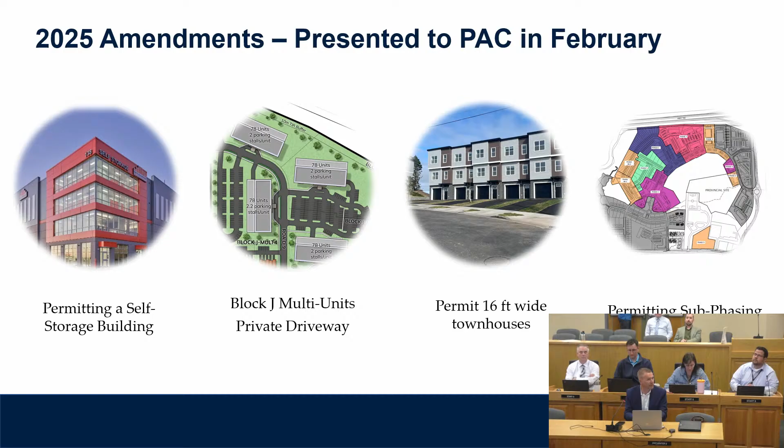So what did we hear? Well, the first thing we heard was that there's a lot packed into this request. So today we're going to break it down a little bit more succinctly and really explain the why behind this ask, the general comments about why we are asking for this, and what's driving it. So we'll cover that today.

There are questions about wetlands and stormwater and the environment and how that works, so we'll dive into that. Townhouses, why the change to 16 feet, multiple residential, private driveway - not feeling quite right about that - so we'll talk about how we address that. Self-storage, is that the right fit for the community? And then sub-phasing, really what are the implications from a municipal perspective? So that's what we've heard, and that's what we'll attempt to cover today.

So let's talk about the why. A lot of this is to work to reduce some of the end home pricing for the community. When we applied for the DA back in 2018 and finally had it signed in 2020, you can see the average price of residential homes in Nova Scotia was in and around the 250 mark. Let's fast forward to today - it's now 450, knocking on 500. That's a big number. We all recognize that.

Surfing on MLS and looking for this - this is a townhouse in our development, the least expensive product we have. It's coming in at 520. When we're working with the builders, saying look, when you're building roads and it's $5,500 a foot to build a road, we've got to start bringing this down a little bit. So that is primarily the reason why we're having these discussions here today - let's try and bring the size down, therefore bring the cost down.

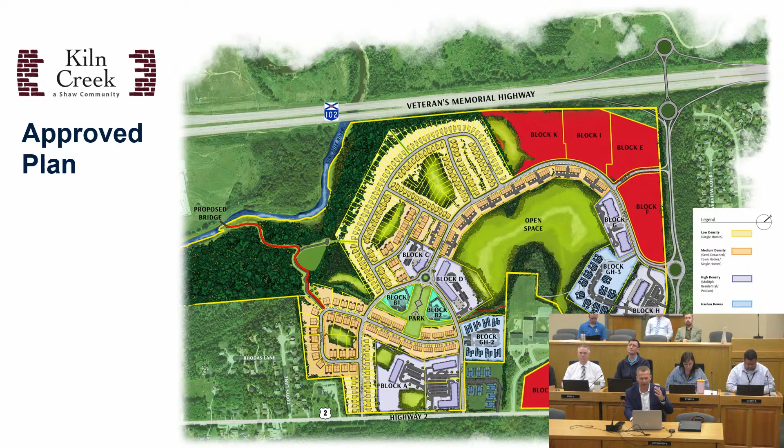Okay, onto the environment. So the big green wetland area on Block K, shown to the north, is the area we have permitted. There are a few questions around how wetland permitting works - we'll give you a high level here today. What I want to convey first and foremost is this entire 247 acres is covered by a comprehensive stormwater management plan. It is not done in isolation phase by phase; the entire project is looked at.

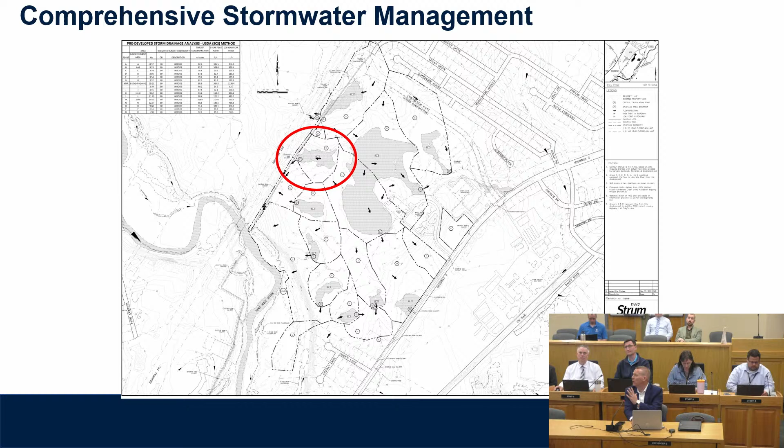That wetland, as shown in that location, actually drains to the north along the highway and then down along Nine Mile River. It doesn't come down into the rest of the development. The rest of the development is comprehensively planned from a stormwater perspective, which means we look at both the quality and quantity of stormwater out of the development to ensure it's balanced.

The picture of the wetland that you see was developed - it's not a natural wetland, it is now, but it was a hole in the ground that we funneled stormwater through to balance that stormwater and create a very nice wetland at the end of the day.

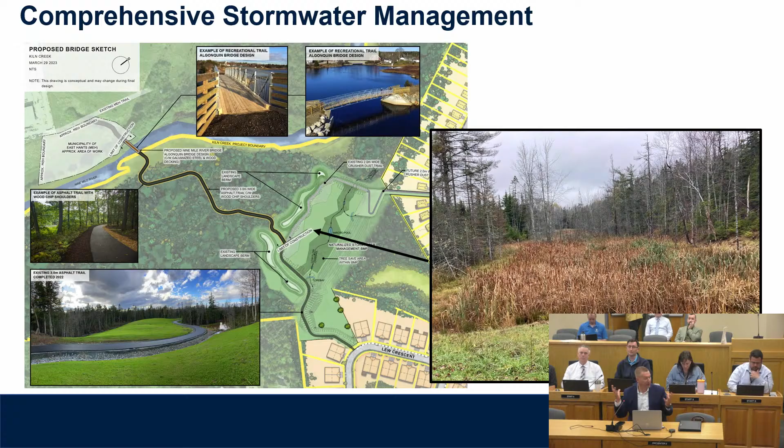On compensation, I'll leave that slide up for a moment - I won't walk through it. But when you go and get approval from the province to remove a wetland, there's a series of steps. It starts with a detailed, robust environmental study to look at the quality of the wetland, its biophysical function, and how that impacts the stormwater around it. It is by far not a rubber stamp - it's an analysis done by our professionals as well as NSDOE's review and critique of it. If DOE does approve the removal of the wetland, in this case they have, it goes into a compensation discussion. In this particular scenario, we're compensating from the stormwater perspective.

Block J is a series of 4 multi-buildings. At one time we had a private driveway running through there. The table said they weren't so sure about that approach, and perhaps it should be a public road instead. That was echoed very clearly by your staff, so we agreed that's the right thing to do. We moved the buildings around, pushed and pulled, to have a bona fide public road. What you've seen there is a full municipal standard public road that'll allow, just like any other public road, snow removal, fire trucks, solid waste, everything.

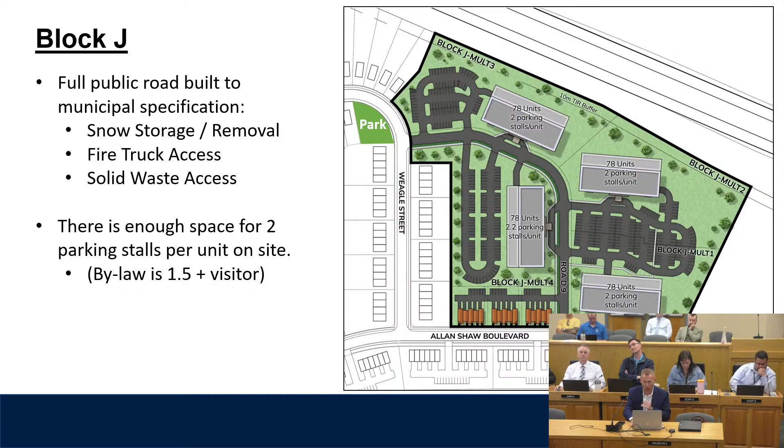In terms of fit and location, we prepared an image to give PAC a better sense of what this might look like and feel like. It's a nice transition from the commercial area into the residential, up against the highway. It's on a collector road, which seems to fit with what we're all collectively trying to accomplish. So we think we've addressed much of what we heard from PAC.

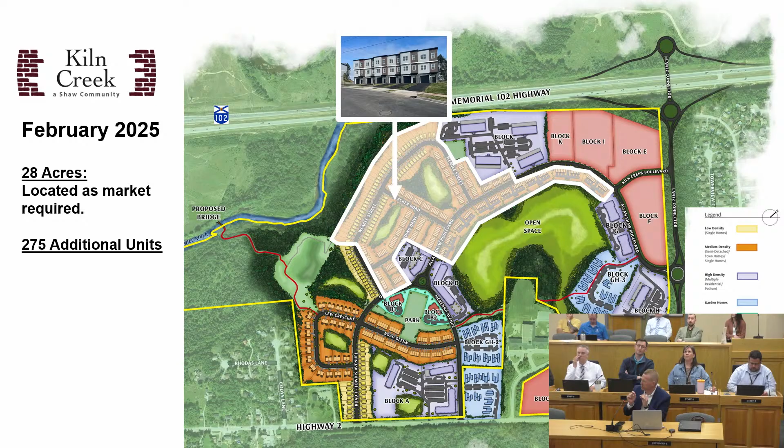Let's go on to the smaller townhouses, the 16-foot wide towns. We went in there and asked for this type of land use over every area in the white, anywhere in the white we want to put it, 28 acres. I think that was an overzealous ask of PAC, so we went back and reworked it, asking where we really think they should be appropriately placed in this development. Let's pull it back from 28 acres to 14 acres, let's half it, and really define where they would fit within the community.

It's shown in white. Along Allan Shaw Boulevard, they're lined along there with parking at the back. You can't see it because it's highlighted in white, but it's rear parking through there. And then the other area has upfront parking, as shown on the screen.

Great question. Someone asked, why 16 foot wide? Why not 15? Why not 14? What's the magic beyond 16? The answer is these units are manufactured at our Prestige manufactured home facility in Sussex, New Brunswick, and the foundations are pre-manufactured at our concrete plant right across the street. You can see the pictures shown here in our West Bedford development.

These units are in our Mount Hope development, and in the West Bedford development, people can drive by and look at them now. The ability to create these units exists in every other development that Shaw operates in, so it's from a modular perspective. That's why 16 foot is the maximum width you can travel down the road.

That's why they're 16 feet. We want to put this type of product in there. It's built to National Building Code. They're a wonderful looking product and very functional. We can control some of that cost because it's our own labor, and we're not subject to the high spikes of demand of whatever the framer wants today. The framer is a Shaw Group employee, and we get to pay them their annual wage, so we can control cost a little better. As I've said, they're existing now in our communities and they seem to function rather well.

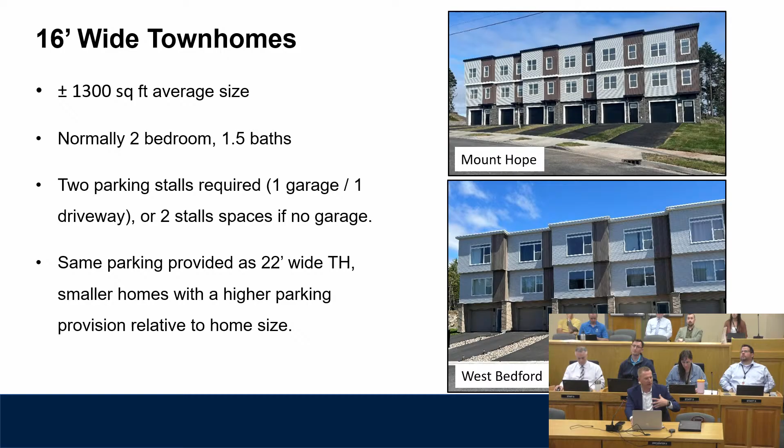Each one of these units will have 2 parking spaces, either out front, in behind, one in the garage and one in the front. There are several ways to deal with it. So that's over and above what you normally require for a single family unit.

Let's talk about self-storage. There's the rationale behind self-storage, and this is it.

We're working with our multi-residential builders to say, can you reduce your rent? Can you make your rent a bit cheaper, less expensive? And they said, we got to make the units a bit smaller, we got to make the parkade a bit smaller. I'm like, okay, well, how do you do that? I said, well, storage. So I noodled a bit on that and picked away on it.

And what it turns out is people in the area that are selling the homestead have winter tires they have to store, Christmas decorations they have to store. When you're downsizing from a house, you have a lot of stuff. And so what the residential builders have been doing is building units big enough for storage. The problem is that it comes at a cost.

So we said, okay, what if we had a 4-story office-style self-storage that'll adjust that? That way you can bring the unit size a bit down. If people want to rent storage for their things, God bless, they can rent storage for their things. That seems to be the right way to handle that.

But I need to say this. We're not hung up on this. If PAC says not interested, no problem. Our focus is on housing, that's our focus. We think this helps the discussion, but if PAC said, I just don't think it fits, it's better elsewhere, no problem, better elsewhere. Drop it off the application and move on with life.

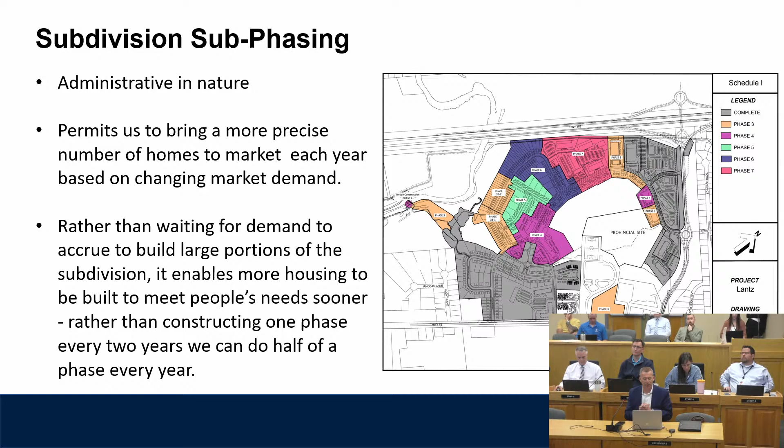All that to be said is it's at the discretion, ultimately at the discretion of your staff from an engineering and safety perspective. We're not running out of bounds on that in terms of second means of access and that sort of thing. So it's at the discretion of your director of engineering and your development officer, and we'll take it from there. But that's the rationale, it's just matching market with infrastructure.

So what we've heard, we think we've covered. You had such a great debate and discussion. We took a lot out of it, listening to it, and thought we can address a lot of this. And I think we have.

When you look back and look at the body of the work going forward today, we're thinking, with your feedback, we're thinking we have a plan now that matches, we think, your community plan. That is a visionary document that you adopted some time ago now. We think this matches your vision, your intention.

Did we step a little too far and ask for a little too much? Yeah, I think we probably did, and you're course correcting accordingly. So that's what we're here today to do, to help course correct that, listen to you, and provide you what we think is a better plan forward.

And I think I would be remiss if I didn't thank your staff in helping us right-size the proposal, saying this might be a better approach, this might be a better way of looking at this project. So I thought it's really important to thank your staff as well. So with that, thank you very much, and I'm certainly here for any questions.

Thank you, Kevin. Any member of council? What are we going to do here? Councillor Tingley.

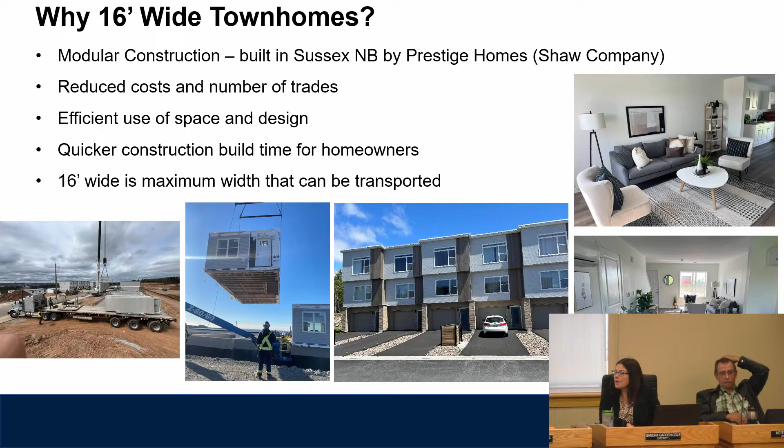Okay, I see that, obviously an advantage from the developer's point of view to get more units in there. I see it as an advantage to people, hopefully it's going to bring the price down some. When I picture our residents there potentially, there's not grass or green space for them, but I guess in the world we're living in right now, that's what our residents are going to have to sacrifice in order to get homes that are affordable - that they're not going to have lawns and whatnot.

And parking, we have an issue on Sam Crescent at the top of Tyler and Enfield, so parking is always a concern.

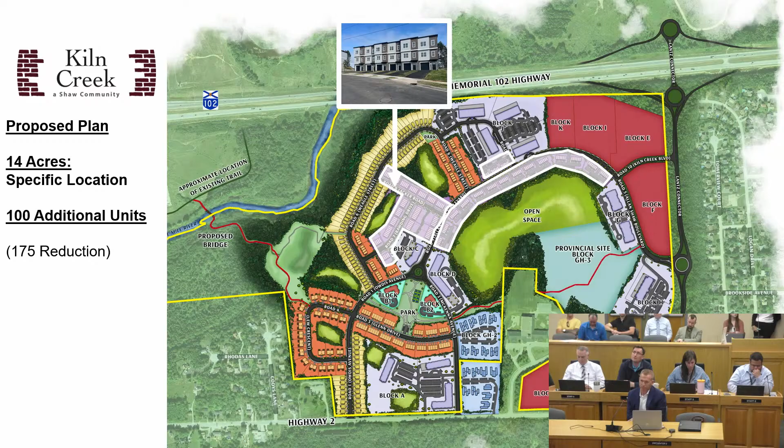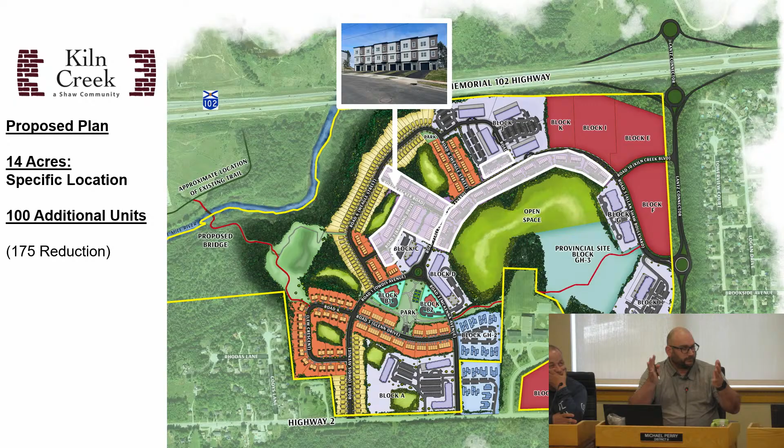When you downsize and go from a house into an apartment, storage is a big concern for a lot of people. If you look at Halifax and Dartmouth and other places, these not-large-footprint, 4-story, almost office-building-type storage units are what's preferable for residents of densified areas. So I think there's warrant in looking at that and at least having the public look at it as well, because it's not just your spot for putting a spare car into storage - it's where you're storing the stuff you want to rotate through your house that you don't have on site because you don't have a garage or storage. It's very common - even when we were in Ottawa for FCM, in developments with 30 and 40-story buildings, there are storage facilities like this within vicinity for that exact reason. So I think it's a way to let people still enjoy things they've collected over the years without making the building they live in bigger. It's easier to put all the storage in one building rather than adding storage to every other building that's built. Thank you.

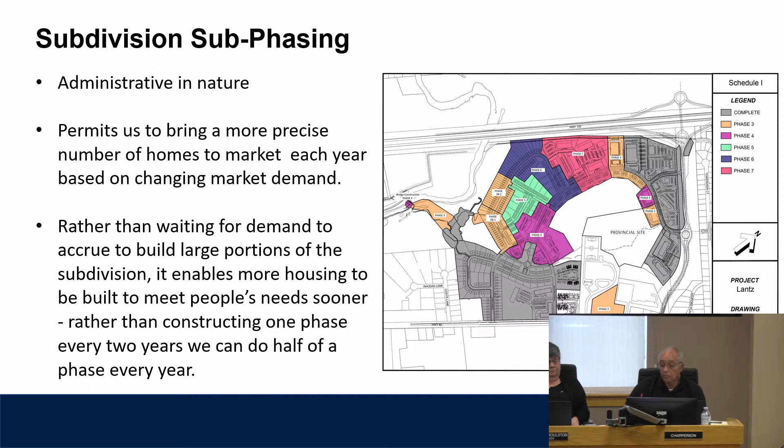Thank you, Mr. Chair. Great presentation, Kevin. The storage building, is it going in an area that's already built or a new area that's being proposed to be built? Is there any construction around it right now? Any resident living there, or just a totally new area?

Through you, Mr. Chair. It is slated for Block K, as shown on the map. It's red. It's right beside the multi-use buildings, so it's a good transition use.

Okay, but nothing's there for now. Correct, nothing there. So my point is the people who are going to live around that, they're going to know beforehand, before they move there, that this existed over there. And if they don't like it, they probably won't buy the house or won't live there. So I don't think that's an awful thing to do. It's great to have storage where you have 5,000 people living, moving to the area or more, to have at least an option for them to have storage there. And to me, it looked like a building, it doesn't look like storage. It looked very nice, and I like it. Thank you.

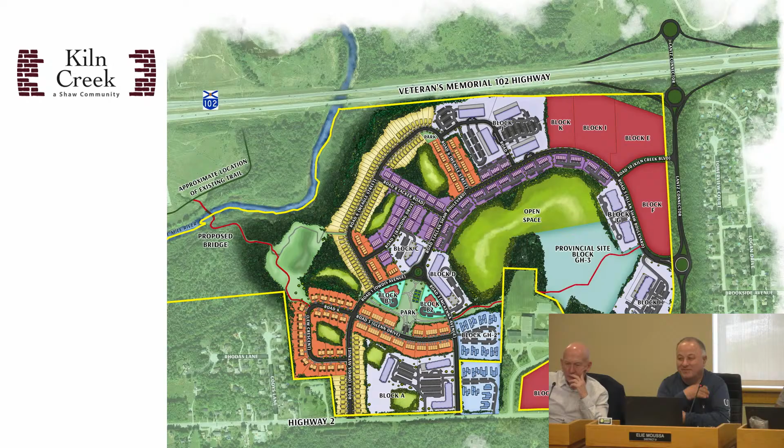Thank you, Mr. Chair. And through to our speaker, Mr. Neat, thank you for the presentation. Very interesting. A question for you about some of the other blocks. That was a question I had too, about what the latest thinking was on the location of the storage facility. So you've answered that, but is it possible, looking at some of the other blocks, and I apologize if you provided the information previously, but just to kind of color in a little bit what the latest thinking is about some of the other blocks?

Through you, Mr. Chair. In terms of the commercial blocks? Well, I guess specifically looking at block K, I, E, F, and block 3. It's not jumping out at me what's happening behind the scenes here. Thank you.

Thank you. Through you, Mr. Chair. Indeed, there's nothing quite shown on the plan. Those, aside from Block K, those are all sold to third parties now, and so there's an active developer with plans in the works. There's several developers, 1, 2, 3, 4 developers in total. They have a lot of commercial experience, certainly in the area. I think I should perhaps leave it at there. It's a bit premature for me to talk more about their private lands, but I think it's fair to say it's commercial service type of use that looks to capture those living in the community around it. Thank you. That's all.

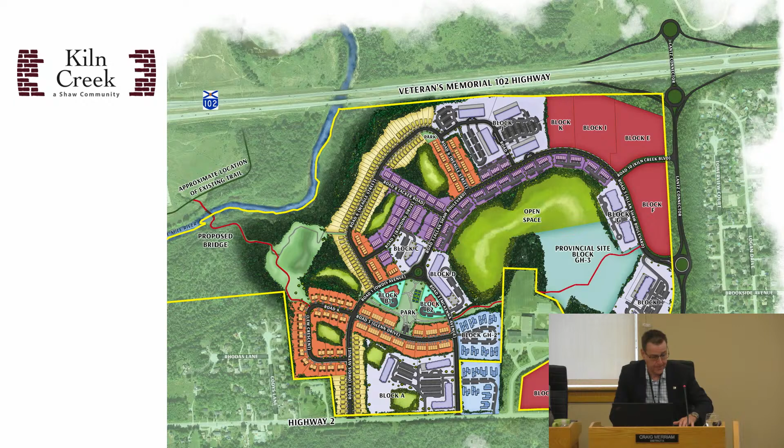Warden Roulston. Thank you, can be very brief. Just to say, I really like your 2 parking spaces. That makes a big difference in people's lives. And that's my comment. Thank you.

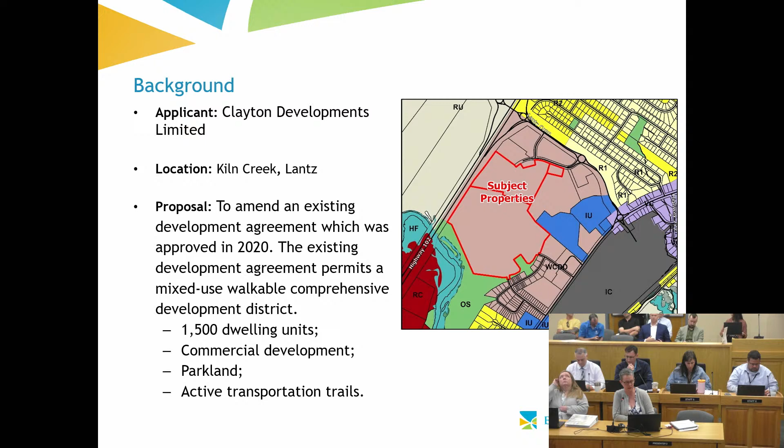Thank you, Mr. Chair. A lot of this will be familiar to you now after the presentation by Mr. Neat, so I'm not going to go into too much detail. Just to remind you that the original application was approved in 2020, and it permits a mixed-use walkable comprehensive development district, which included 1,500 dwelling units, commercial developments, parkland, and active transportation trails. You can see the aerial photograph here, where I've just outlined the properties in red.

The development proposal includes self-storage use, the proposed multi-unit residential, 16-foot wide townhouses, and subphasing at subdivision. Regarding the self-storage use at Block K, you can see that zoomed in a bit more there, and that was originally identified as Block I, so it has always been a commercial area for all the developments.

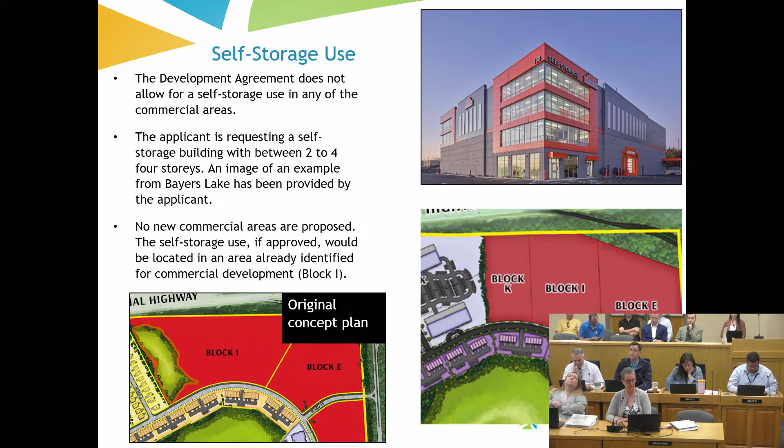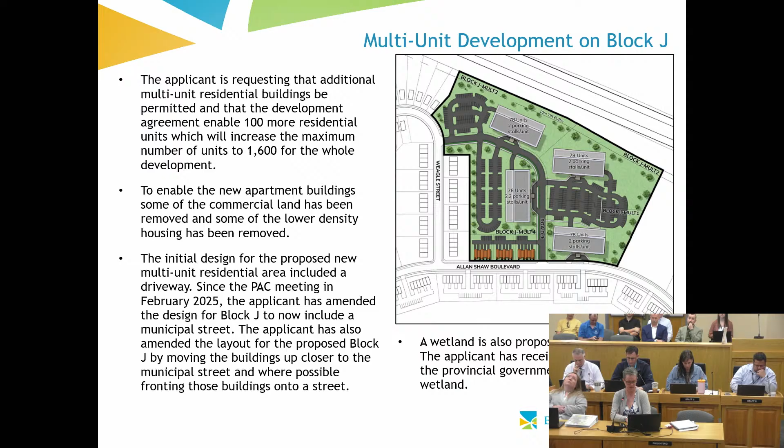For the multi-unit residential area, they're proposing on the concept four buildings for multi-unit residential, and the overall amendments to the concept plan will result in 100 more residential units. As Mr. Neat mentioned, this area has moved from a private driveway to a municipal street, which will meet the standards outlined in the development agreement and match the standard for other local streets in the development. The developer has already mentioned the wetland proposing to be altered.

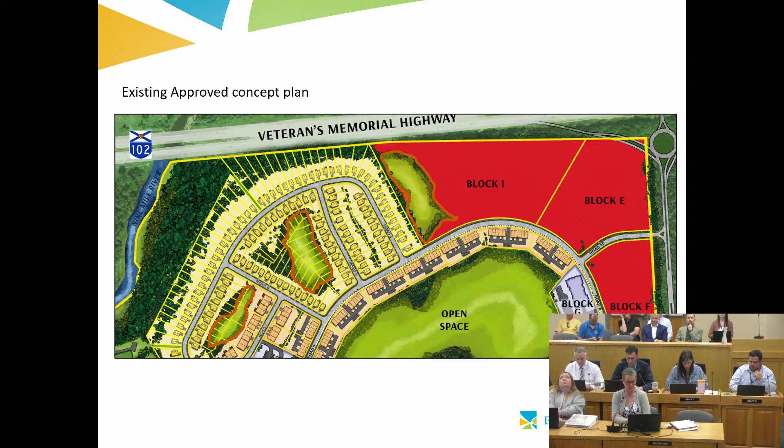This is the original concept plan, zoomed in on the area mostly subject to this application, and this is the proposed concept plan. I wanted to highlight today that the developer will also be providing a pocket park in this location, which will be land provided through the development agreement process.

The image here shows the 16-foot wide townhouses from Mount Hope. Staff are aware that off-street parking is an issue, and we'll be reviewing how the townhouses address parking. But as noted by Mr. Neat, and as in the existing development agreement, they are required to provide 2 parking spaces per unit, which is double what is required in the land use bylaw, since that requires 1.5 spaces for buildings over 6 units, and only 1 space for buildings under 6 units. This development will provide 2 spaces per unit.

Mr. Neat also mentioned that since the meeting in February, the applicant has adjusted the concept plan to remove some of the proposed 16-foot townhouse units.

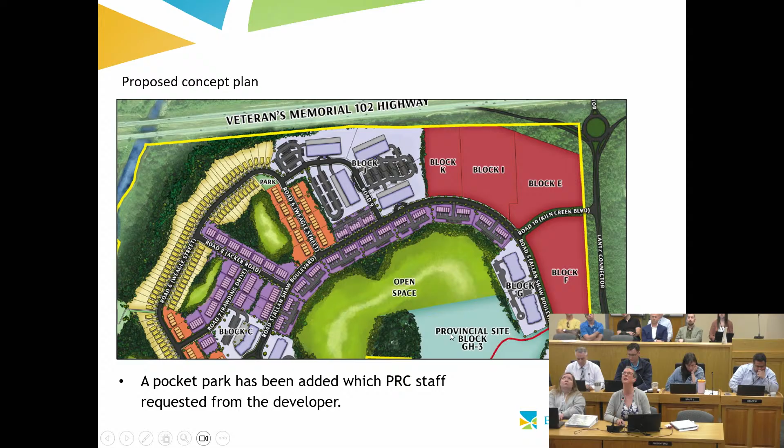There's also the element requesting subphasing in subdivisions. As noted, there is an increase of 100 units, but this count includes the removal of 55 units now in this area. The province has purchased some land from the developer, and there was a proposal for garden homes in that area, but that has been removed from the development.

The applicant has submitted a traffic impact study, which has been provided to the Nova Scotia Department of Public Works and the Municipal Department of Infrastructure and Operations, and we will provide those comments in the final staff report. Planning staff will also consult with the Municipal Department of Economic and Business Development regarding the loss of some commercial land, and the applicant has submitted a post-development master stormwater plan.

It's been updated since the original plan submitted with the 2020 application, and a copy has been sent to Infrastructure and Operations. Essentially, the engineer designing that system is signing to confirm that's the concept for the area, but each subdivision application will require a detailed stormwater management plan submitted at that stage.

Planning staff will comply with the citizen engagement policies, and a letter and questionnaire will be mailed out to property owners within 300 metres of the subject property. As you can see, we're at the initial consideration stage, and the recommendation is that the Planning Advisory Committee lift motion PAC 23 from the table and recommend that Council give initial consideration to the application by Clayton Developments Limited, and authorize staff to schedule a public hearing.

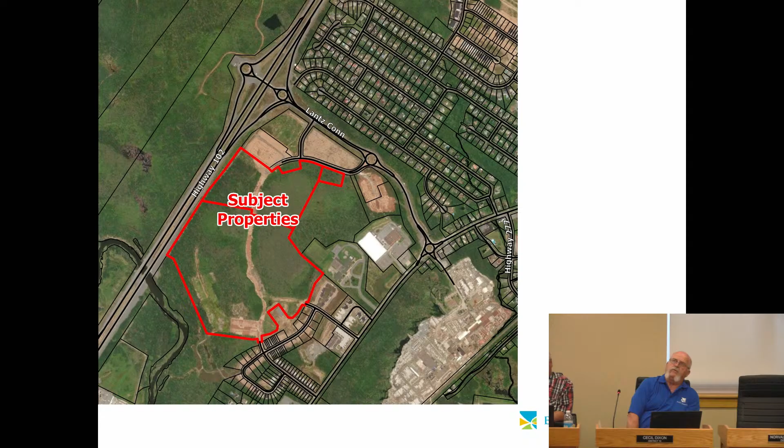Thank you, Councilor. Nobody left to speak, we'll go to the vote. The motion is passed, 12 to 1, with Councilor Rhino voting nay.

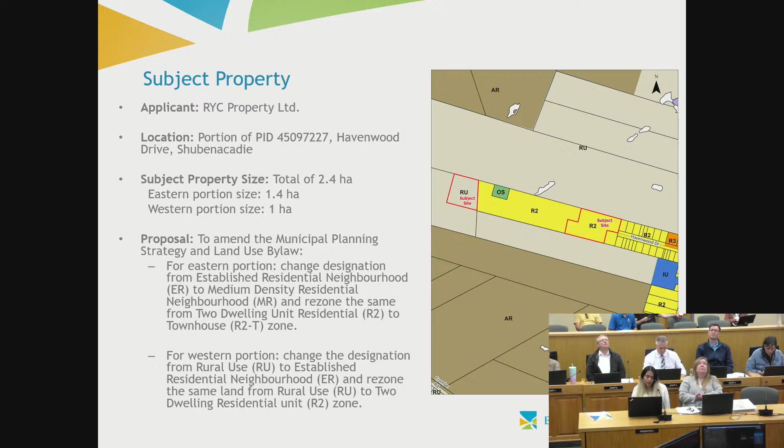The proposal is to amend the municipal planning strategy and land use bylaw. For the eastern portion, change designation from established residential neighborhood to medium density residential neighborhood, and rezone from 2 dwelling unit residential to townhouse zone. For the western portion, change the designation from rural use to established residential neighborhood and rezone from rural use to 2 dwelling residential unit. The application includes a request to allow development of four townhouse buildings for a total of 24 dwelling units on the eastern portion. The proposal to rezone the western portion from rural use is due to a retracement plan extending the property approximately 100 meters further west to accommodate 10 semi-detached units for a total of 20 units.

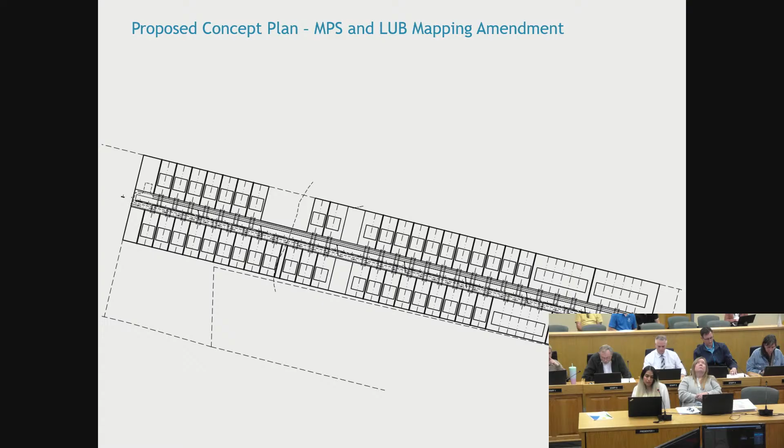A stormwater pond is proposed to be located to the southeast of the property. Here we have the proposed concept plan and MPS and land use bylaw mapping amendments. As shown in red, the western and eastern portions, and the stormwater pond is proposed on the south side of the eastern portion.

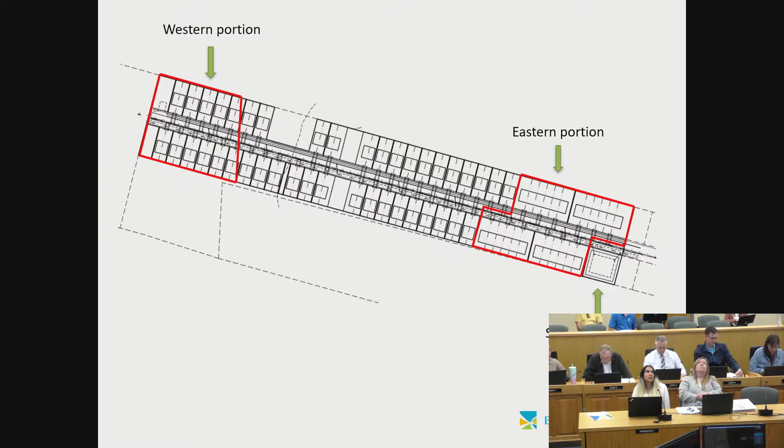And there's some pictures here. As you see, the first view shows Havenwood Drive, and the second view is the land where the townhouse is supposed to be.

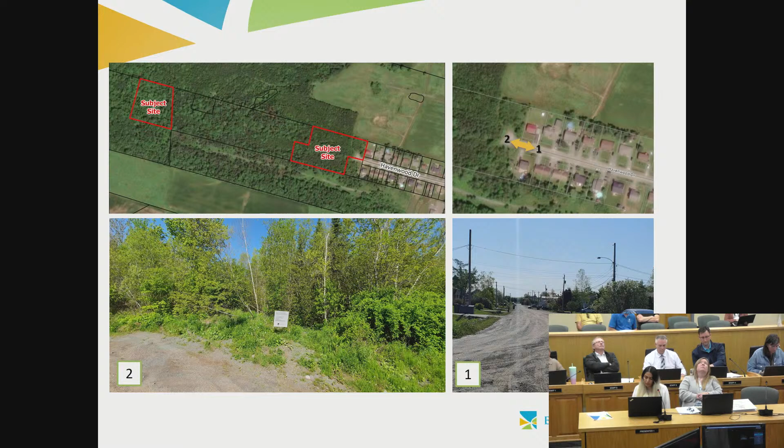Based on the last designation zoning approval for Havenwood Drive in 2024, the MPS and land use bylaw have changed. The existing developed portion of Havenwood is a public gravel road owned by the province. Under the requirements of subdivision bylaw regulation, the proposed road extension will be a municipality-owned paved road with a sidewalk.

Policy analysis: Policy RD29 of the Municipal Planning Strategy is the policy that guides council in evaluating a proposal to establish a new medium-density residential neighborhood designation area. Planning staff will assess the application using the criteria set out in this policy.

Policy IM11 of the Municipal Planning Strategy is the policy that permits council to consider the proposed mapping amendments. East Hants Council has to determine if the proposed application is in the best interest of the municipality. Policy IM11 permits Council to consider a private application to amend the municipal planning strategy where the proposed amendments are in the best interest of the municipality.

Policy 10.16 of the subdivision bylaw established that no more than 100 lots shall be serviced by a single road access. Existing lots total 25, and based on rezoning approval in 2024, 47 additional lots. The current proposal is 41 lots, semi-detached buildings, and 4 townhouse unit lots, for a total of approximately 70 lots and 142 dwelling units.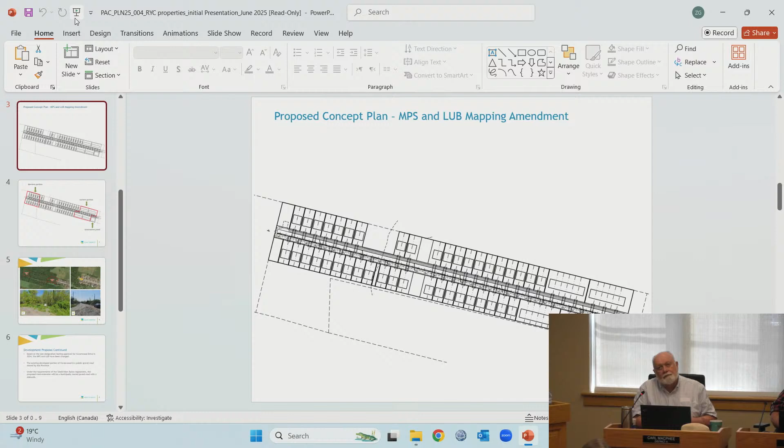Through you, Mr. Chair, it really depends on the format. If you go back to the site plan here, as you can see, there are 4 blocks of townhouses. Each of those blocks is permitted to have 6 townhouse dwelling units if doing an on-street townhouse development. So each block can have 6, and under the 70 lots, those are counted within the 70. If the applicant wanted, they could rent them out that way, or they could subdivide them off up to the 100 lot maximum, selling each on-street townhouse separately.

If it's sold, it would be separate lots then? Yeah, they could do it that way. Okay, thank you. I would like to make the recommended motion.

Planning Advisory Committee recommends that council authorize staff to schedule a public information meeting to consider an application from RYC Properties Limited for mapping amendments to the GFLUM and LUB maps for portions of PID 4509-7227, Havenwood Drive, Shubenacadie.

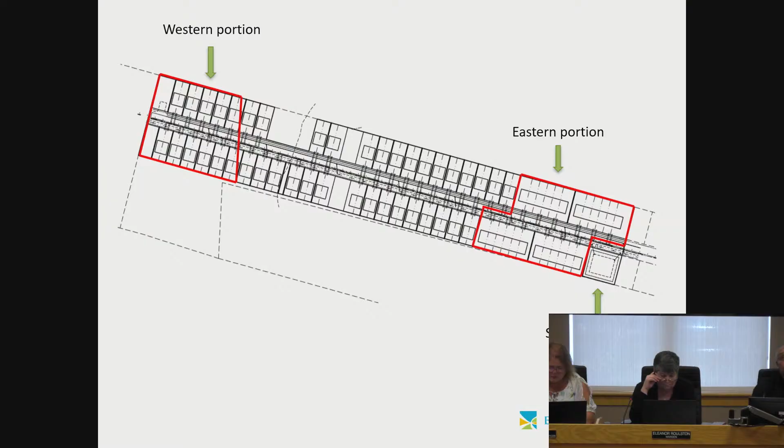Okay, yeah, I see. I missed the 4 townhouse lots when I did my math. That's okay, thank you. Thank you, Warden.

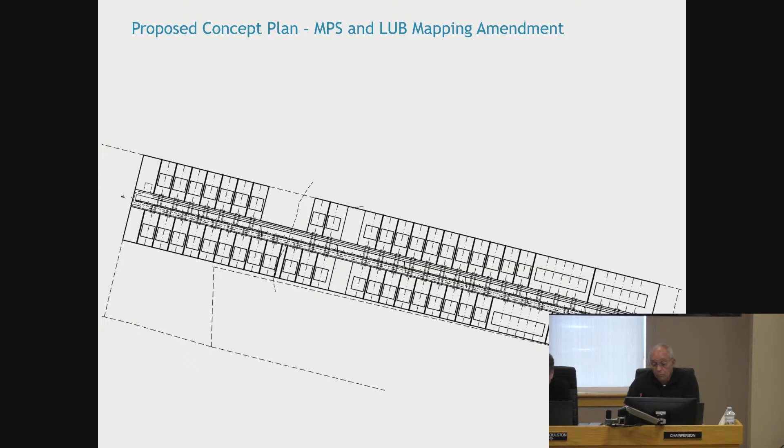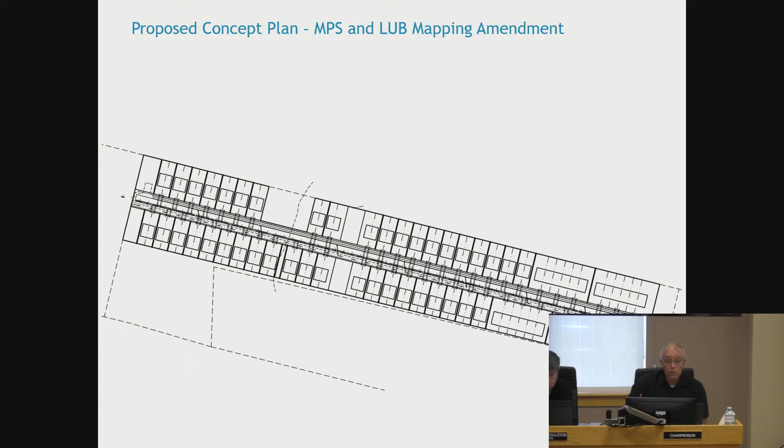Nobody left to speak, we'll go to the vote. And the motion is passed unanimously. Good job. Thank you, Zara, for that report.

Next item on the agenda is Plan 25-003, Serenity Lodge amendments to official community plan. And Debbie, you can begin when you're ready.

Thank you, Mr. Chair. So on March 26th, Council passed a motion to direct staff to find a way forward to assist Ms. McCaskill to separate her business and dwelling two PIDs through a development agreement or an alternative, and that's for Serenity Lodge. Under the current land use bylaw regulations, the subdivision of land cannot take place on a right-of-way easement in the growth management areas serviced by municipal water and wastewater.

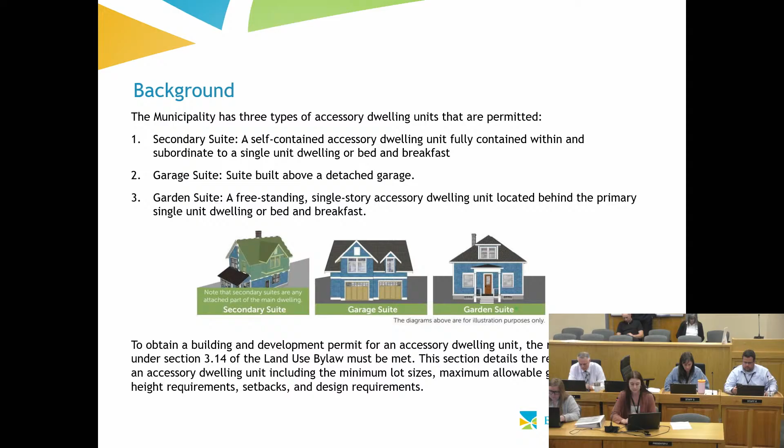So motion C25-159 relates to the requirements for the minimum lot size required for an accessory dwelling unit. The current regulations for the minimum lot size are shown in this table. So if the property does not meet the requirements, specifically if it's an undersized lot, it's not eligible to have an accessory dwelling unit. But we do have a clause that permits secondary suites on existing undersized lots in the country residential, rural use, and rural use north zones. For a garage suite, the minimum size is 600 square meters or shall comply with the minimum lot area, whichever is greater. And a garden suite is 920 square meters or the minimum lot area for the zone, whichever is greater.

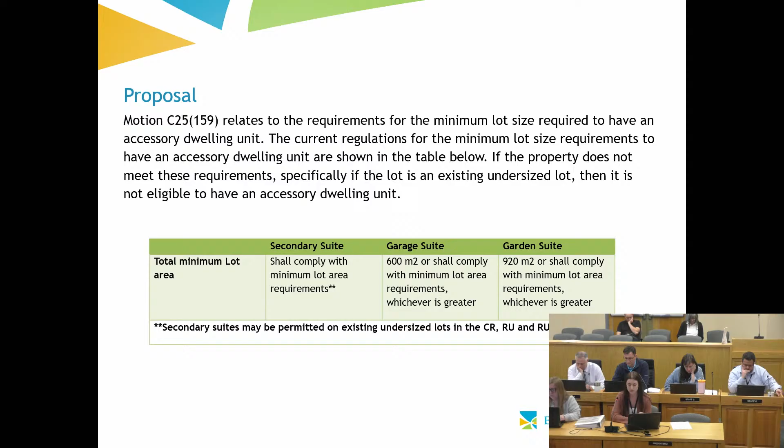So should PAC and council wish to allow accessory dwelling units on existing undersized lots, amendments to section 3.14 are required. An amendment to remove the clause that states garden suites and garage suites must comply with the minimum lot area as described within the zone. By removing this clause, the total minimum lot area for a garage suite would remain at 600 square meters and 920 square meters for a garden suite. All other applicable driveway or on-site septic approvals are still required. So just removing the text in green.

And for secondary suites, we'd be adding to the existing clause to include the Lakeshore Residential Zone as a permitted zone that allows secondary suites on undersized lots, and to add unserviced R1 and R2 lots. So secondary suites would be permitted on undersized lots in the Lakeshore Residential, Country Residential, Rural Use North, R1 and R2 zones that are not serviced by our central services.

So motion C25-28 relates to the design requirements for accessory dwelling units. The regulations currently require that the unit must match the main dwelling in material type, color, and roof pitch, with exemptions for shipping containers used as garden suites, as well as mini homes used as garden suites. Garden suites are also exempt from the design requirements.

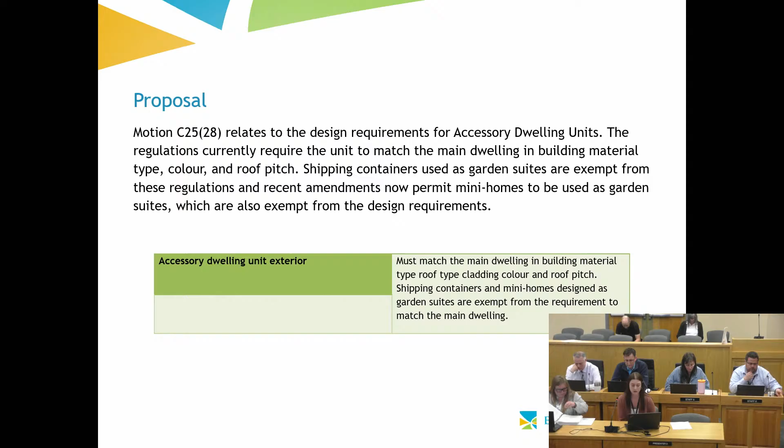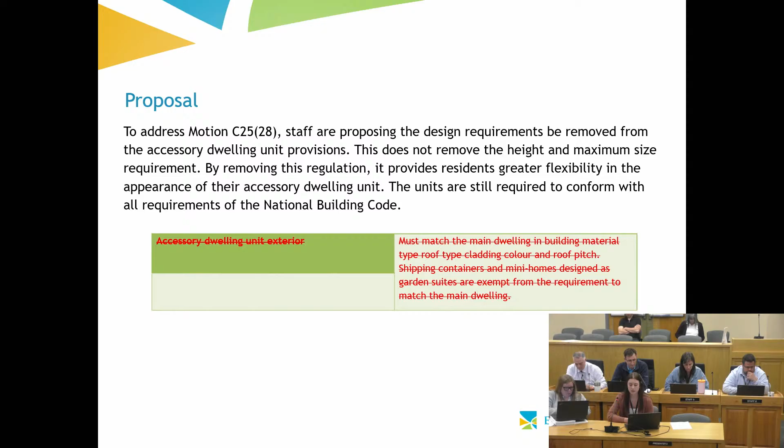So to address motion C2528, staff are proposing the design requirements be removed from the accessory dwelling unit provisions. This would not remove the height requirements or maximum allowable gross floor area, but removing this regulation provides residents greater flexibility in the appearance of their accessory dwelling unit. All applicable requirements under the building code are still required to be met.

For citizen engagement, there'll be an advertisement outlining these amendments in the Chronicle Herald, and questionnaires will not be mailed out as these are not site-specific amendments to the land use bylaw, and a public information meeting is not required as there are no amendments to our planning strategy proposed.

And if council authorizes a public hearing, an advertisement will be placed in the Chronicle Herald indicating the date, time, and location of the hearing, as well as all the information will be on our municipal website and social media platforms. So the recommendation is for first reading of the proposed amendments, and staff are also providing an alternative should

PAC and council wish to remove the minimum lot area requirements for accessory dwelling units. So this would permit any property owner with a single unit dwelling to have an accessory dwelling unit regardless of the lot size. And this alternative would meet the intent of the motion that was passed.

Staff do recommend keeping a minimum lot size in place for garden suites and garage suites to ensure that smaller lots do not result in having a higher lot coverage, because this would be a particular concern for lakeshore lots where you have higher lot coverage. It may result in some environmental concerns, including more impervious surfaces on the property, resulting in more challenging stormwater management, flooding, and runoff concerns into lakes.

So that's an alternative, but the recommendation and recommended motion are presented. Thank you, Mr. Chair. Thank you, Leanne.

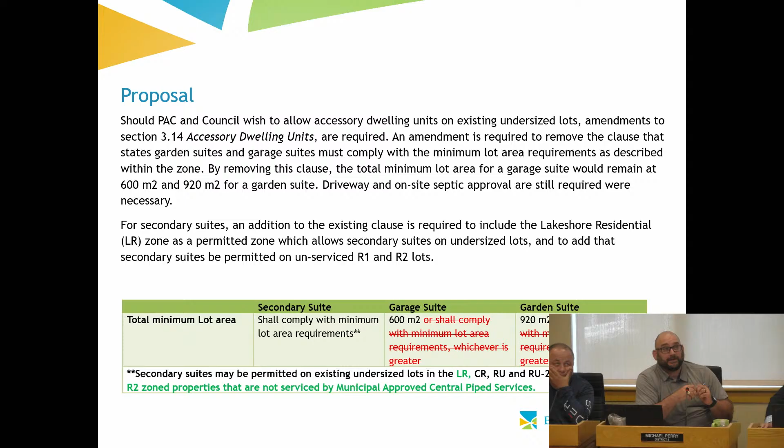I don't know off the top of my head if their lots are 600 meters square. And I think that's, you know, so that's the only question I have. Thank you.

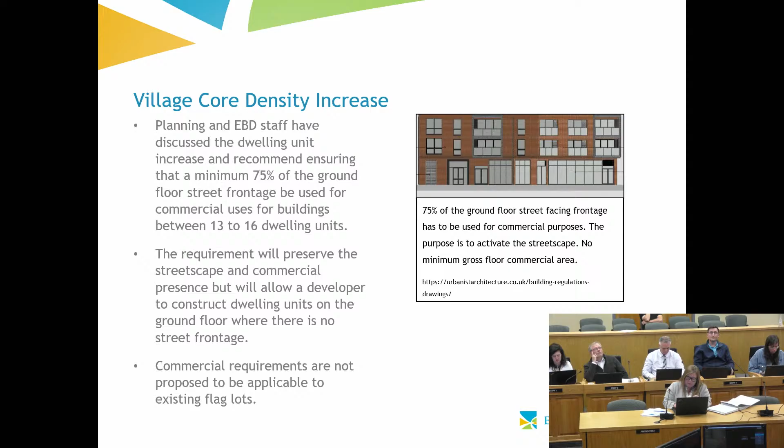In addition to allowing for the increase to the number of dwelling units, both the maximum gross floor area and the maximum building height will have to increase to enable the increase in unit numbers. At their May 2025 meeting, Council gave first reading to amendments which included a maximum gross floor area of 1,888 square meters. The purpose of increasing the gross floor area is to enable the development of 16 two-bedroom apartments and a commercial floor area on the ground floor. Developers who attended the public information meeting indicated that the gross floor area needed to be large enough to accommodate the apartment's commercial area and the corridor and utility areas.

They indicated in the market that approximately 1,000 square feet in area per apartment unit would accommodate market demand. To accommodate the additional dwelling units, staff recommend permitting a maximum of 3 stories without requiring the third story to be constructed into the roof line.

To assist the Planning Advisory Committee in visualizing the mass of a building constructed to the maximum gross floor area under our current regulations versus the proposed amendment, staff have provided an illustration showing the size of the buildings. So this is the current 835 square meters, and this is the proposed 1,888 square meters.

As an example, if it's divided over 3 floors, this is Les Turner's building on Highway 2. It's approximately 835 square meters, 3 stories, with the 3rd story built into the roof line.

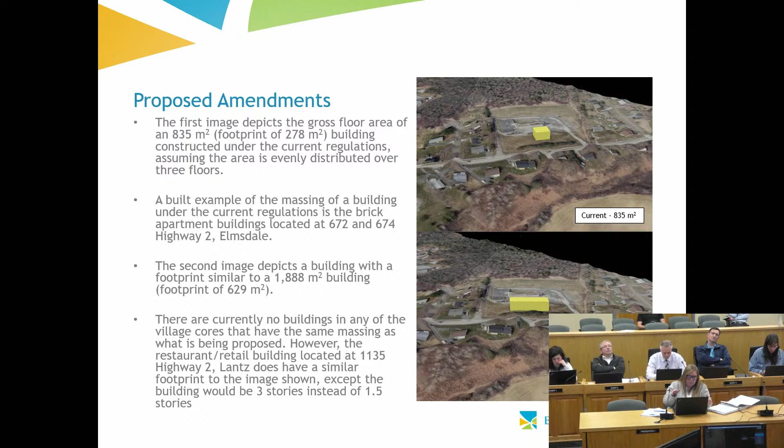There's no current village core buildings built to 3 stories with that size because our regulations don't permit it, but the footprint would be similar to what we have with the Millstone and Lily Pond building.

So that would be the same footprint approximately, not gross floor area. And then instead of a story and a half, which is what's shown here, it would be 3 stories. There's actually a story and a half here because there's a kind of space in the roof line.

Changes are also being proposed to the following: the height to allow for the full 3 stories, transparency requirement reduction on the 2nd and 3rd stories, commercial component not required on existing flag lots, no accommodations general uses on the ground floor of the subject buildings, and new policy added to the municipal planning strategy to enable new regulations. The full set of the proposed amendments are in staff's report.

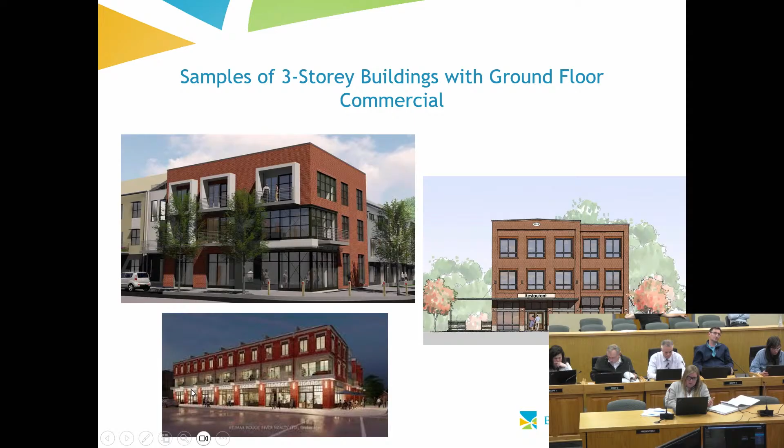These are some samples of 3-story buildings with some commercial on the ground floor. This is probably similar to the footprint you'd be looking at for the gross floor area, so it's a larger footprint, except you'd only be required to have 75% of that ground floor as commercial, and then you could have the entrance to the apartment units at the other end.

For citizen engagement, we've advertised the proposed amendments on the municipal website and in the Chronicle Herald. A public information meeting was held on April 1st, and 2 developers of the Village Core VC Zone land attended the meeting.

The 2 major concerns were the proposed maximum gross floor area being too small at that point in time, and parking requirements. There are no proposed changes to the parking requirements at all.

A letter from Tolson Developments concerning the proposed amendments has been provided to Planning Advisory Committee for their consideration. A public hearing notice appeared in the June 11th and June 18th editions of the Chronicle Herald, and the notice will be on the website as well.

In conclusion, the increase to the number of dwelling units in the Village Core Zone was a commitment that East Hants made when entering into the HAF program. The new regulations will be applicable to all Village Core VC zones.

Existing design requirements will still be applicable to all new buildings, and new commercial requirements will be added to ensure the land use pattern lends itself to providing more human scale development that has an interesting fabric at street level. Diversity of buildings and land uses will keep the Village Cores interesting and inviting to pedestrians and local commercial development.

The recommendation is to give second reading and approval to the proposed Village Core amendments, and the recommended motion is below.

Thank you, Mr. Chair. Thank you, Debbie. Good report. Warden Ralston.

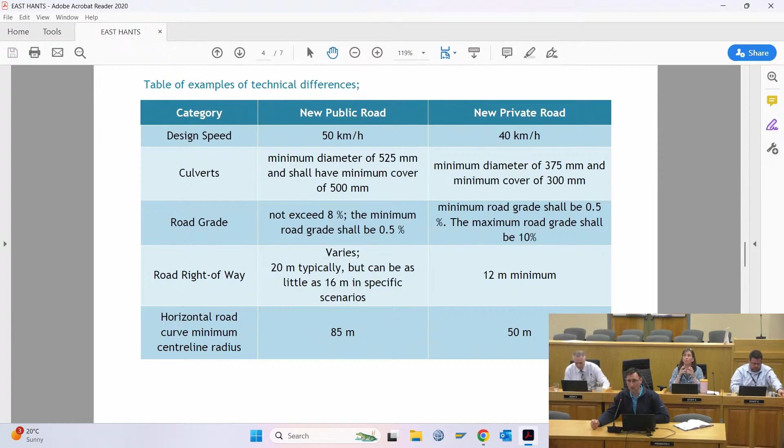So that's it in a nutshell of where we got to at that time.

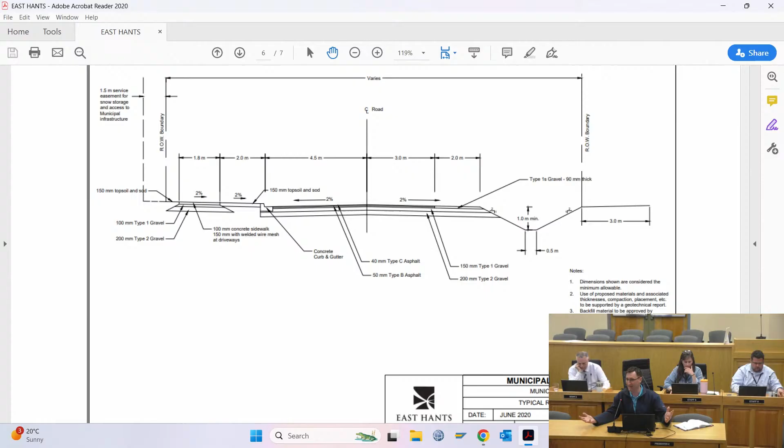There isn't, and within the report and attached to the report, I just showed the basics. So a cross section, it's pretty basic versus a public road. We've got all kinds of different criteria and design considerations. The private one is very basic, very straightforward.

So I did misstep a bit in describing private driveways, something that's emerged in the last 5 years that didn't play out before there was a standard. We now have this emergence of private driveways.

I'm stating that it's more in the serviced area. That's actually incorrect. There's private driveways emerging all over East Hants. In the urbanized area, they end up being within DAs, so there is some level of discussion.

What's happening, and planning helped me articulate it better this morning, unfortunately it's not in the report, is that a lot of flag lot designs will create a private lane, a private driveway, which isn't a road and doesn't have to meet the private road standard. You can have multiple flag lots sharing an easement. It's called a driveway, and it's a named driveway that you'd see on a road, but it's not a public road.

And so it's still imperfect because there's yet another workaround that's emerged. There's still folks finding ways of saying, hey, we don't want to build a private road because we don't want to build to a standard, so now we'll make it a driveway. That's just how things have evolved.

But that option is in play, and I'm not saying it's a wrong option. It's something that people are using, but it's debatable, it's subjective.

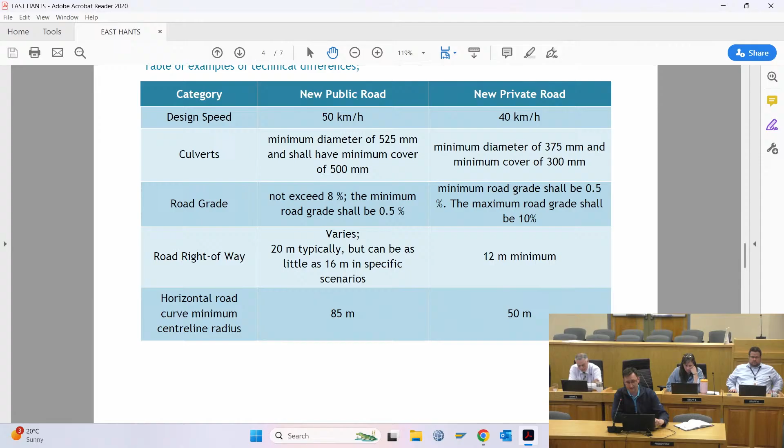But ultimately, it's about choices and trade-offs. That's what private roads are for East Hants. Decisions have been made in the past. They can be changed — you can take a different approach as a council in the future if you so choose.

Staff don't have a recommendation with this report because it was a background report. We're not saying it's perfect the way it's operating, but there'll also be trade-offs if another direction is chosen by council. So I'll leave that for now and open it up for discussion.